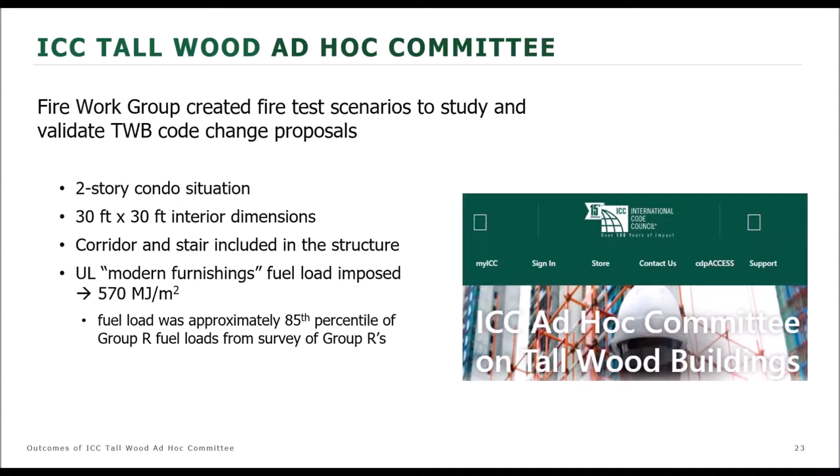There was also a corridor and a stair shaft within the test structure at each level. The fuel load was based on a North American study of fuel loading for residential use groups. In fact, to ensure rigorous test conditions, furnishings and other combustible contents were added to achieve a fuel load equivalent to the mean plus 1 standard deviation. So the actual fuel load used within the test structure corresponded to approximately the 85th percentile of residential fuel loads when compared to that survey.

The expressed purpose of the test series was to evaluate occupant egress tenability, firefighter attack tenability, also to assess systems response to fire, such as the sprinkler systems and other systems like fire penetration fire stops and so on. And then, of course, most importantly, to guide code development.

The series, which consisted of 5 separate fire tests, was conducted at the ATF Fire Research Laboratory, and it was supervised by Forest Products Laboratory staff and administered by the Forest Products Laboratory staff.

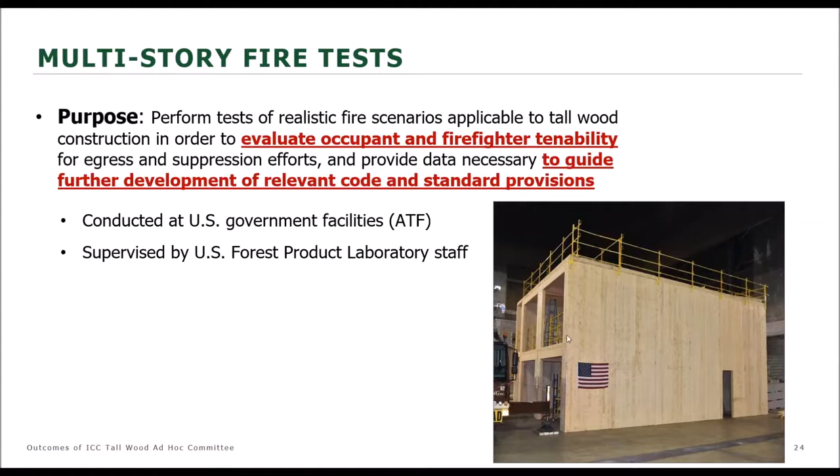The photo on this slide here on the lower right shows the CLT test structure in which these fire tests were performed. All 5 of the tests were performed in the same test structure. Of course, there were some rehabilitations performed between each test in order to repair any damage, such as the non-combustible protection and so on. But yeah, all 5 of the tests were performed in this same structure.

By the way, that's the same structure that Paul showed a photo of as an example of how big CLT panels can be.

So this is the apartment or condo floor plan that was selected by the fire work group for the 5 tests. There was one 900 square foot apartment on each level of the test structure with a corridor leading to a stair shaft on each level. So you can see that these fire tests were truly full scale. It was a full-size apartment or condo on each level.

The TWB Ad Hoc Committee insisted that the construction must be compliant with the current IBC, as well as with all of the proposed code changes that were being developed simultaneously. To achieve this, 20-minute rated entry doors were installed on the apartments, and 90-minute doors were used on the stair shaft to separate the stair shaft from the corridors. The corridor was instrumented to determine firefighter tenability and occupant egress tenability within this egress route.

So the scenario represented by the first 3 tests was a highly unlikely one, basically an unlikely overlap of 2 scenarios. The first part being that the automatic sprinklers fail to activate, and the second part simultaneously being that the fire service does not respond at all to suppress the fire throughout the entire duration of the fire. So basically, we're looking at the realm where those 2 scenarios overlap, which makes it even less likely.

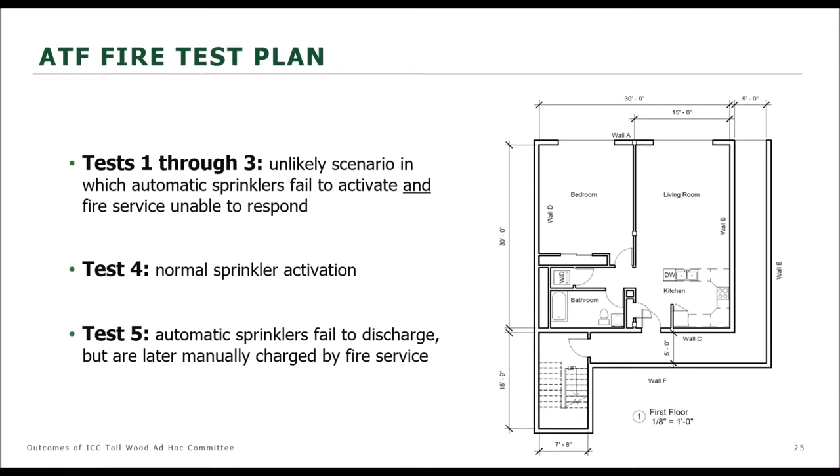What I'm talking about here deals with the TWB work product and the prescriptive provisions that they developed, which will go into the 2021 IBC. I'm not talking about any potential performance-based designs or alternate means and methods or anything like that.

This is the test matrix for the individual tests within this series. Test 1 served as a baseline to establish the performance of fully protected mass timber. This fully protected configuration represents type 4A construction, which is what they had envisioned at that point, though it became known as that later on. At any rate, test 1 is equivalent to what's now recognized as type 4A.

Test 2 was an investigation of partially exposed mass timber on the ceiling, representing maximum allowable exposure in type 4B construction. Test 3 was an investigation of exposed mass timber on the walls, again representing the maximum area exposed allowed in type 4B. So tests 2 and 3 were representative of type 4B.

Test 4 looked at sprinkler effectiveness in mass timber construction. It was the shortest lived test - within about 6 minutes, the sprinklers had effectively extinguished the fire.

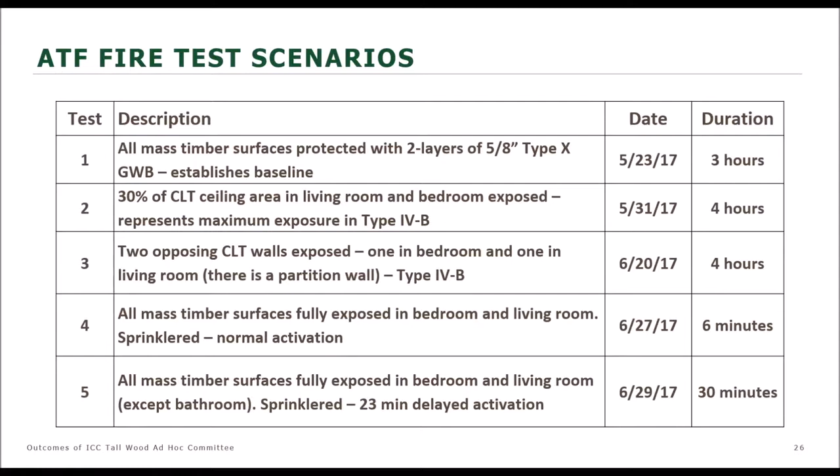Even with all of these furnishings and contents, it was still necessary to add additional fuel load in order to achieve the relatively high TWB specified fuel load. As I mentioned earlier, the specified fuel load was one standard deviation above average for Group R occupancies. So in order to get up to this required level, wood cribs were also added to the test structure for each test, and the fuel load was the same for all 5 tests.

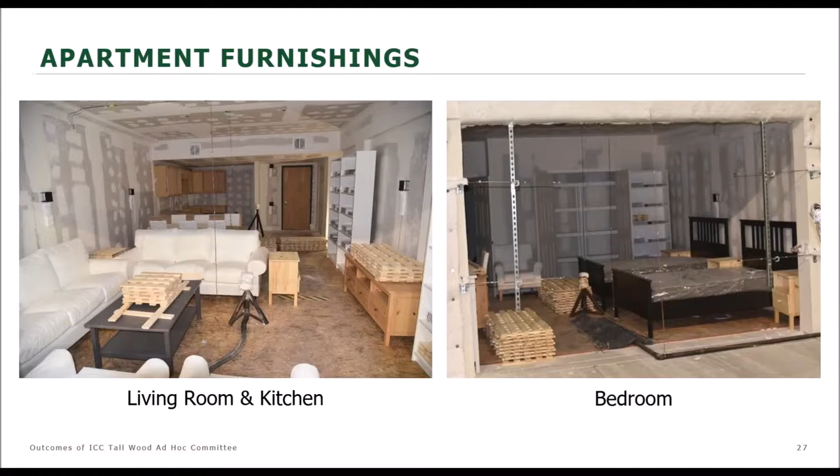That's because most of those combustible contents have already been consumed at this point, which is why the fire is decreasing in intensity during the decay phase.

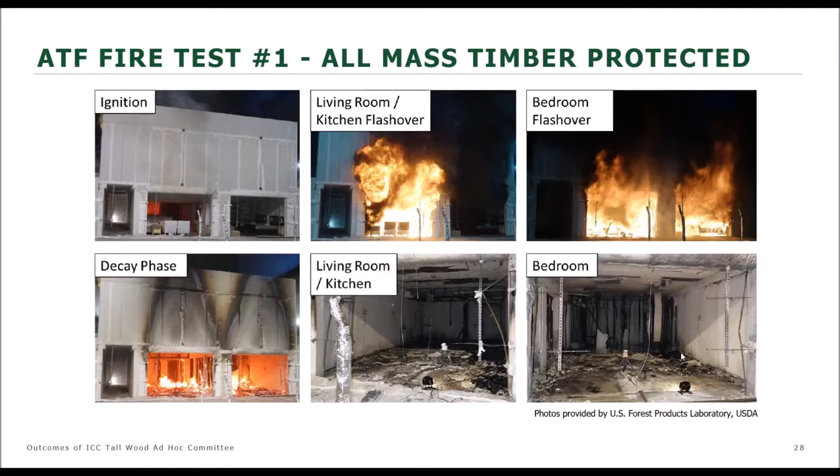Note that all of the combustible contents and the unrated partitions are gone. You can barely see the unrated partitions here. There'll be better photos showing the unrated partition later on, but the mass timber structural elements are essentially unaffected. The mass timber elements also did not become involved or contribute to the fire.

In test 2, 30% of the CLT ceiling areas in both the living room and the bedroom were left exposed. This amounted to 20% of the overall ceiling area, or overall floor area, of the total apartment.

We'll talk about that — I'll show a slide later with an excerpt of the code language which specifies these exposed area limits. But 20% is the limit for the ceiling area, so this basically maxed out the allowable exposed ceiling area for type 4B.

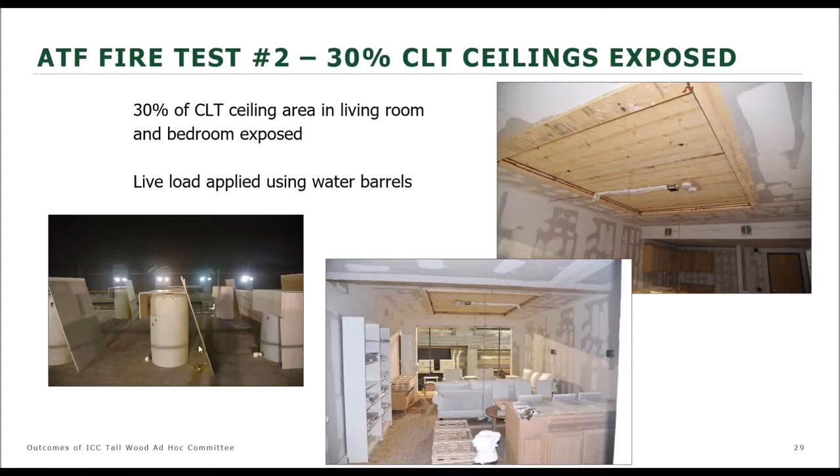I didn't show a video of fire test 1 because we only have time to show one brief video in this presentation. So I chose to show fire test 2 because this one has some exposed areas on the ceiling — you can see in a few of these panes the exposed areas.

In these panes down here, you can see the men in firefighting apparel igniting the fire. It was ignited in the lower kitchen cabinet — the same place, ignited the same way, for each of the 5 tests for repeatability purposes. I'm going to fast forward here a little bit until you'll see it spreading.

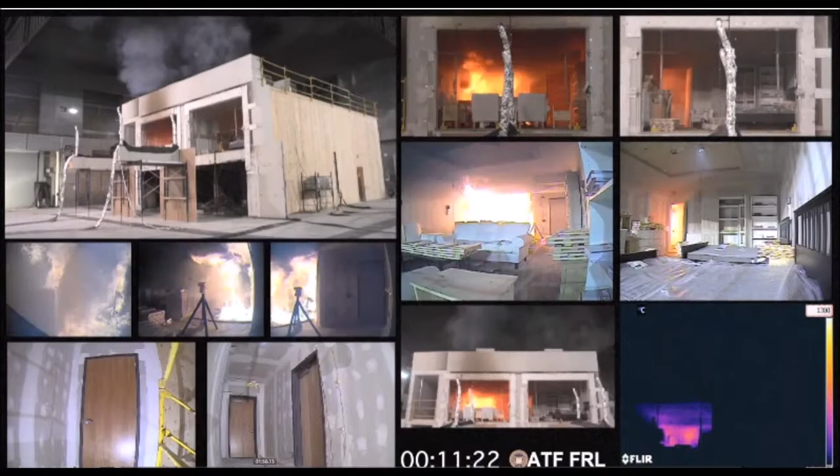Especially as I fast forward here, it's spreading onto the combustible floor covering. Then I'll fast forward to flashover, which, as I said, occurred at about 12.5 minutes — and that's right about here.

So there's flashover — notice flashover has only occurred now in the left portion there. That's where the living room and kitchen are. Again, the ignition was in the kitchen cabinet, so that makes sense.

If you look over here in this pane, this is a shot of the bedroom, same with this. You can see the flames and smoke starting to come into the bedroom. The bedroom door was left open, as were all of the interior doors, in order to allow for the fire to spread unhindered.

However, the self-closing 20-minute rated entry door into each of the apartments was left closed for each of these tests, except for one test, which I'll explain later. For each of these first 3 tests, that self-closing door was left closed because it would be closed since it's self-closing.

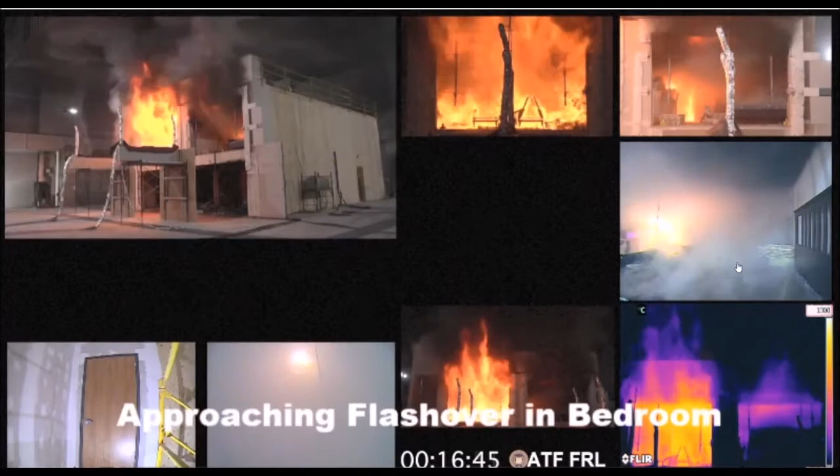Now we're approaching flashover in the bedroom, which occurred about 4.5 or 5 minutes after flashover occurred in the living room and kitchen. And that's it, it just occurred there — you saw the bed start to flash.

In this screen, you can see the plumes coming out of both openings now, both from the bedroom and from the living room and kitchen.

So this is what they'd call the fully developed phase here. This is a fully developed fire throughout the entire floor plan of the apartment. Now I'm going to fast forward, and as the combustible contents are consumed, you can see the intensity of the fire diminishing.

This is the decay phase that I referred to earlier. And for the latter half of the test, it continues to decrease in intensity until at about 4 hours. This test was carried out to 4 hours just to make sure that there were no flare-ups or fire regrowth or anything like that. And there wasn't. So it had pretty much self-extinguished.

You can see a little bit of smoldering over here in the bedroom at the end of the 4 hours. That was just some remaining combustible contents. I think they were books that were put into a bookshelf there in the bedroom.

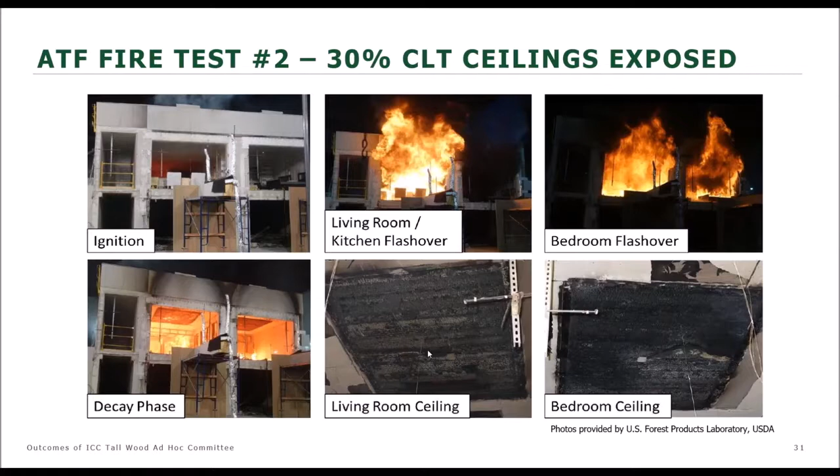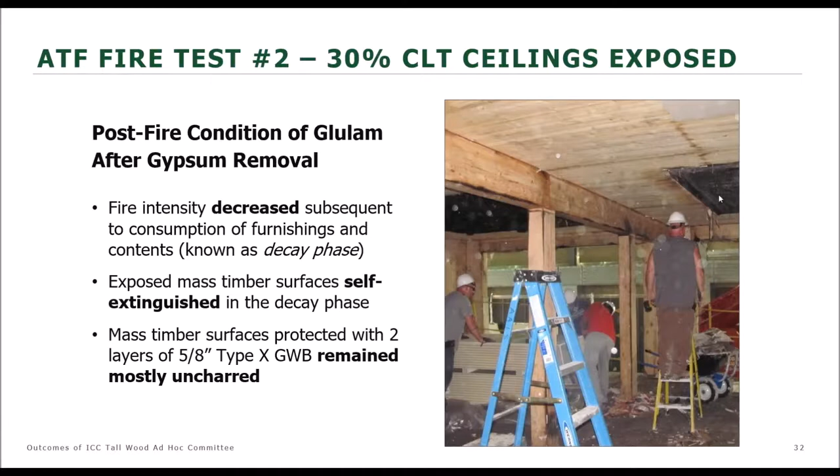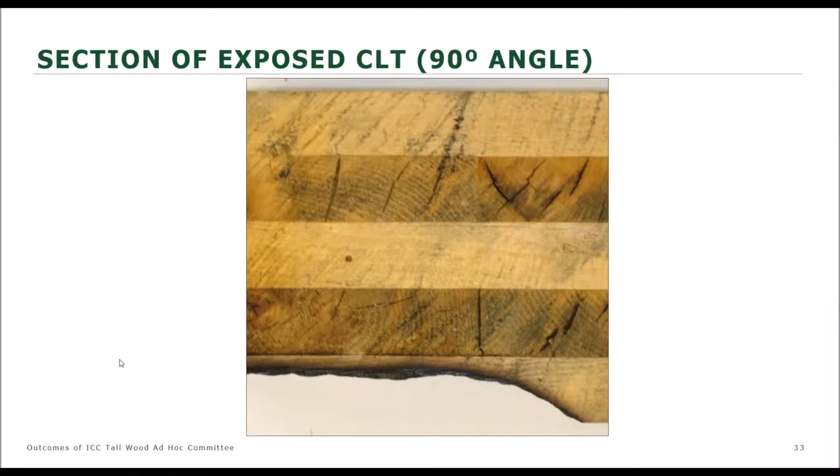The center wall separating the bedroom from the living room was light gauge steel. It was constructed with light gauge steel infill between the glulam columns, and it had 1/2 inch unrated gypsum board on each side. This wall didn't need to be fire resistance rated because the loads were carried by the glulam columns and beam, which were fire resistance rated.

So as expected, the center wall quickly disappeared during the fire test, leaving only the mass timber walls and columns and beams. And of course, they still retain their load carrying ability.

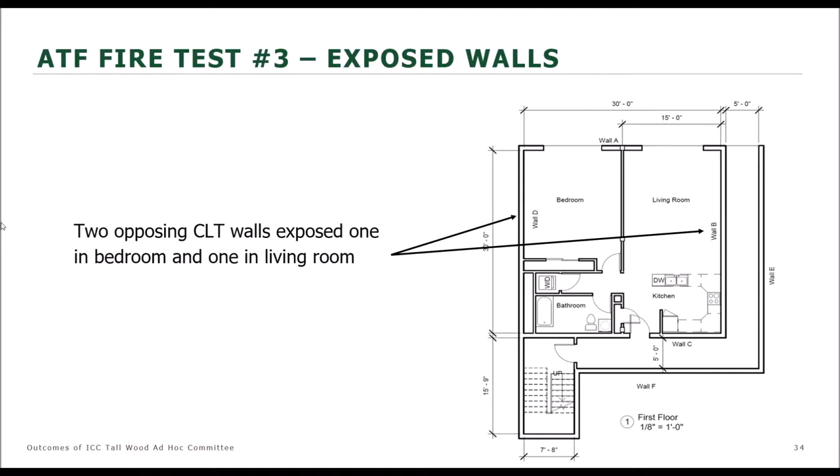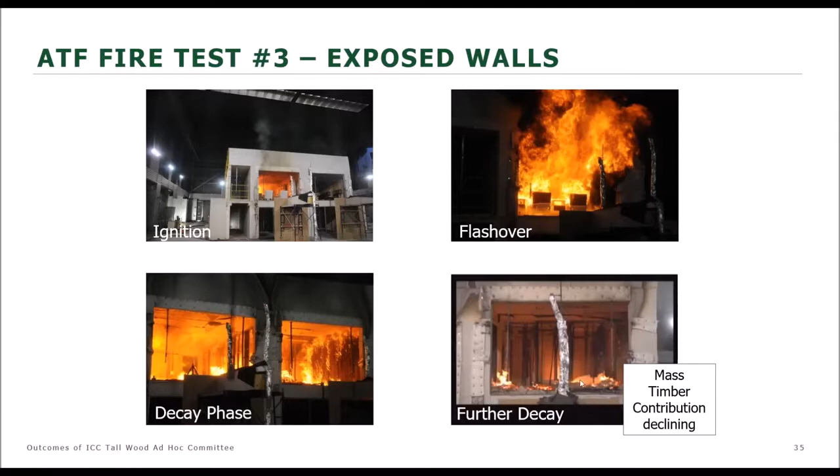In test 4, all of the mass timber surfaces were exposed in the bedroom and living room, and the automatic sprinkler system was allowed to activate normally, which it did at about 2.5 minutes after ignition. Within 6 minutes, the fire was effectively extinguished by the sprinkler system.

It probably would have been extinguished even sooner if it weren't for the fact that the cabinet shielded the fire from direct sprinkler impingement. Remember that the ignition point was under the lower kitchen cabinet in each of these tests. But the fire didn't spread beyond the lower kitchen cabinet, and this is the sum total of the damage that occurred in test 4.

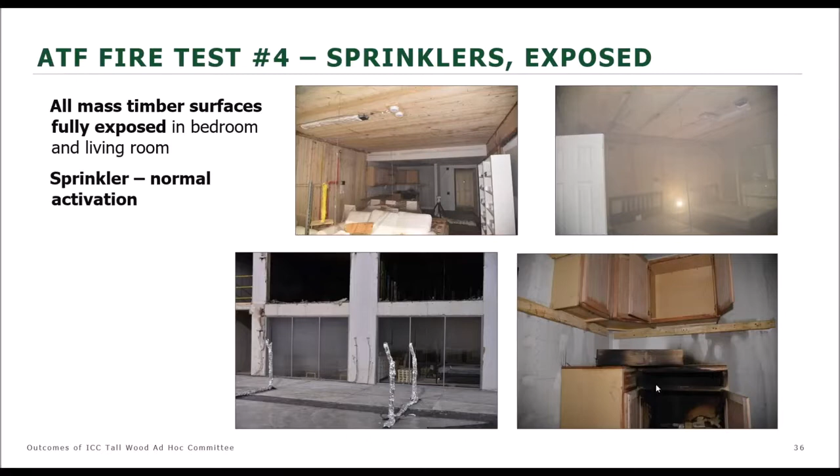Just like for test 4, in test 5, all mass timber surfaces were fully exposed in both the bedroom and the living room. The sprinklers were purposefully prevented from discharging in test 5, though, and then they were manually charged 20 minutes after the time at which the sprinklers automatically activated in test 4. This simulated a scenario in which the sprinklers fail to activate automatically, but are then manually charged at the fire department connection by the fire service upon their arrival at the scene.

Flashover conditions were reached in the kitchen, and the bedroom was very near reaching flashover, although it didn't quite reach it, but it was definitely reached in the kitchen. Within 7 minutes of manual charging of the sprinklers, the fire went from a fully developed fire, which can be seen here in the upper photo, to being effectively suppressed, as you can see in this lower photo. So that was just a 7-minute period between that and that.

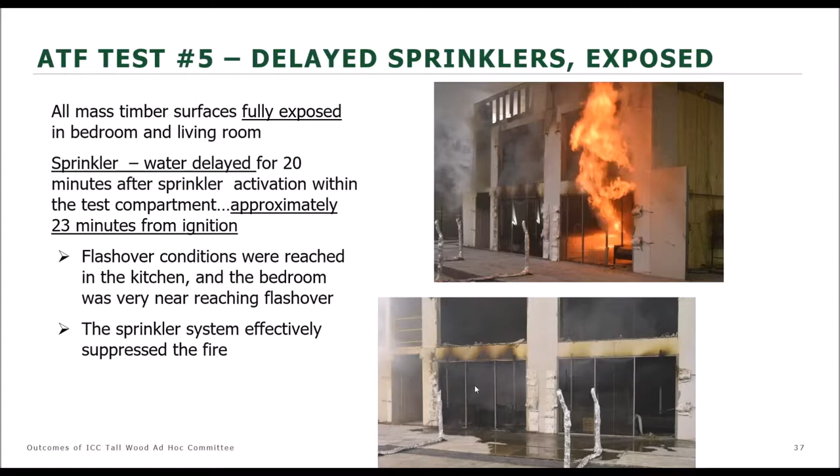As you can see in this summary table for all 5 of the ATF tests, flashover in the living room was fairly consistent at around 12 or 13 minutes after ignition. And the time to flashover in the bedroom for all 3 of the first 3 tests was even more consistent, at about 17 to 17.5 minutes. This is despite the differences in exposed mass timber areas between these first 3 tests.

The time that it took for flames to breach the 20-minute rated door into the hallway was about 27 minutes in test 1 and 30 to 31 minutes in test 2. In test 3, the flaming on the backside of the 20-minute rated door occurred early because the door was not installed correctly, but in any event, the flames did not spread beyond the door within the corridor. And that's evident in the videos of all 3 of these first 3 tests.

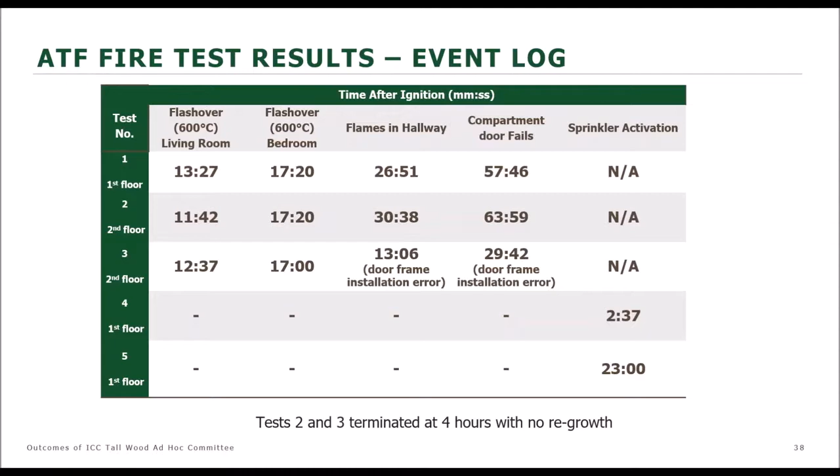The Research Institutes of Sweden, or RISE, used their model to predict the behavior of ATF tests 1 through 3 before they were even performed. The measured data from the actual fire tests closely matched predicted values. For example, in this graph, the solid black line is the predicted heat release rate for test 2, and the blue line is the plot of data collected at ATF for this same test. Based on this, it was concluded that it is possible to accurately model the fire performance of mass timber structures.

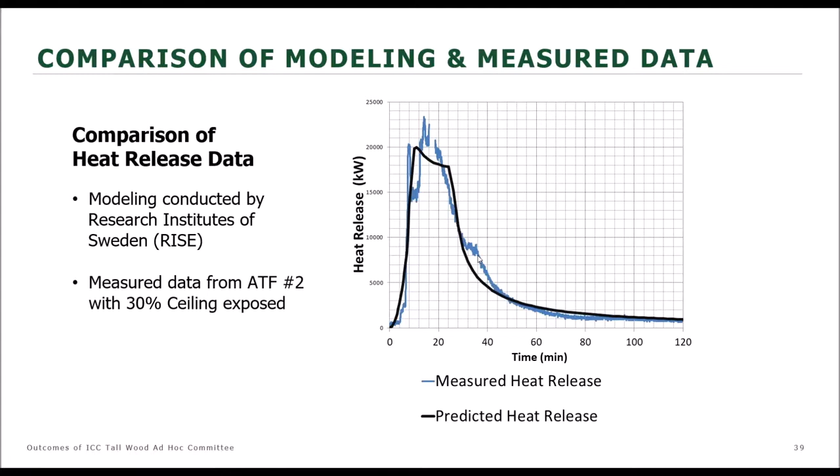The full report that details the results of this test series was published by the U.S. Forest Products Laboratory in 2018, and it's available on their website at this address, or you can just go onto the FPL website and search for GTR 247.

All of the tests and videos were recorded also, and these videos are available for free public viewing, either at regular speed or the time-lapse versions like the one we watched of test 2. These time-lapse versions are available through a link on the AWC website, specifically the Tall Mass Timber webpage.